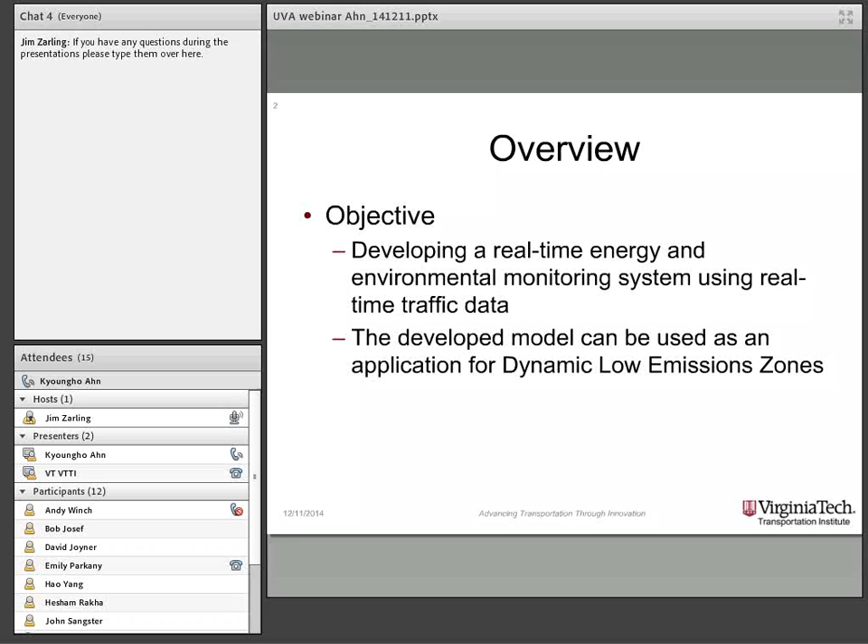The goal of this project is developing a real-time energy and environmental monitoring system using real-time traffic data. The developed model can be used as an application for dynamic low emissions zones. In this study, the real-time traffic data can be connected vehicle data, and I will explain dynamic low emission zones later in this presentation. This project is still in progress, so I will focus on the development of the fuel consumption and emission model for this project.

Background of the project. Surface transportation has significant impact on the environment. The transportation sector in the U.S. accounts for 30% of greenhouse gas emissions and 70% of U.S. fuel consumption. And also, surface vehicles represent almost 84% of the transportation sector greenhouse gas emissions in the U.S. And a key program of MAP-21 is environmental sustainability, to improve the performance of the transportation system while protecting and enhancing the environment.

And here is my first poll. Have you ever heard about the connected vehicle technologies and research programs? Okay, it seems many of you are familiar with the connected vehicle research.

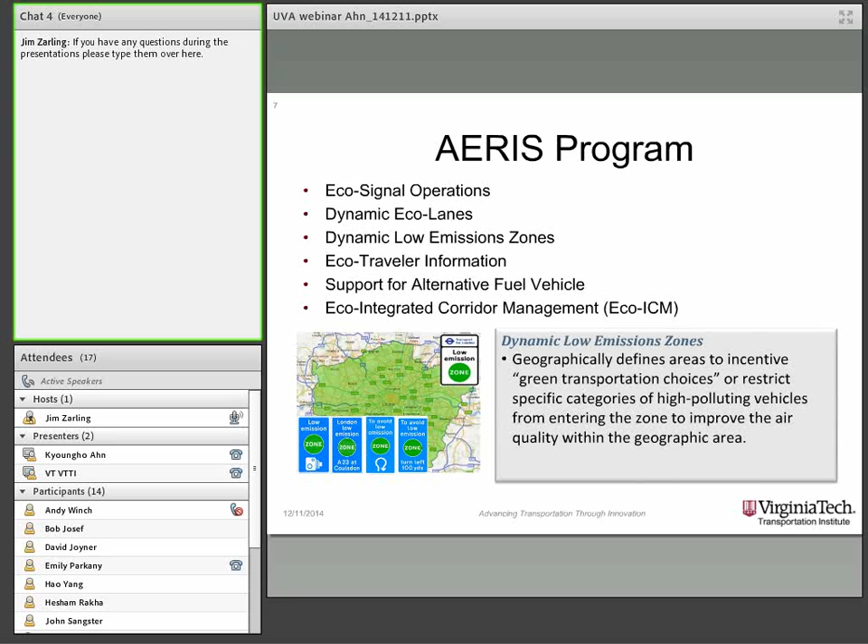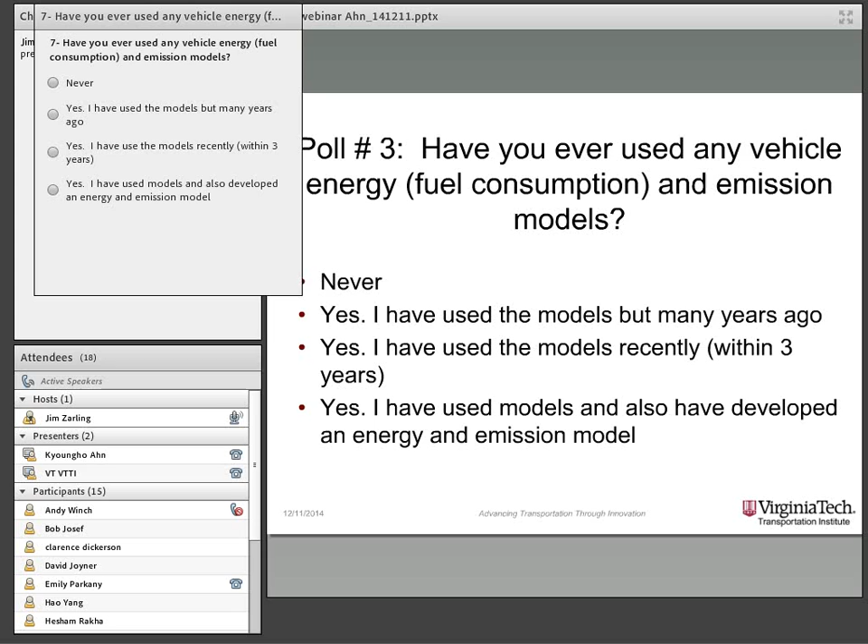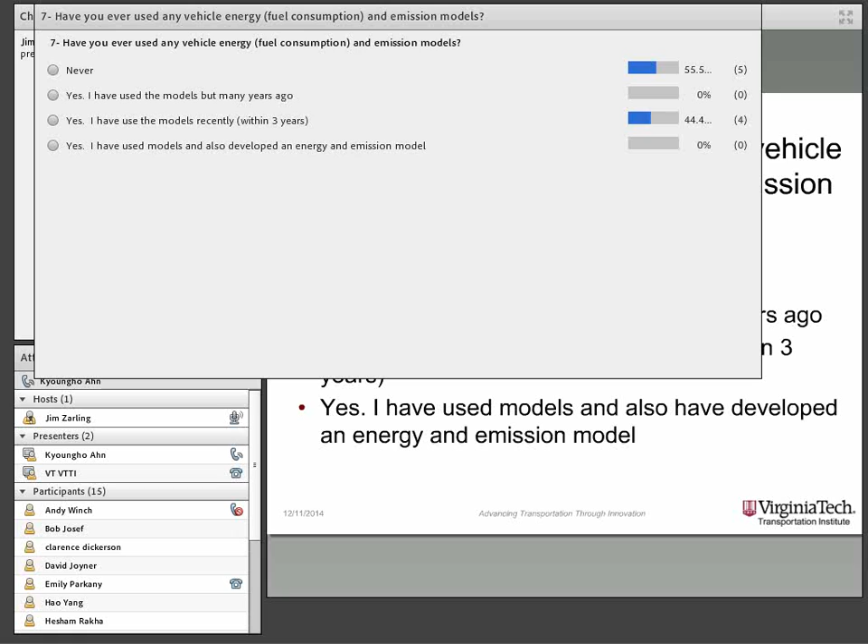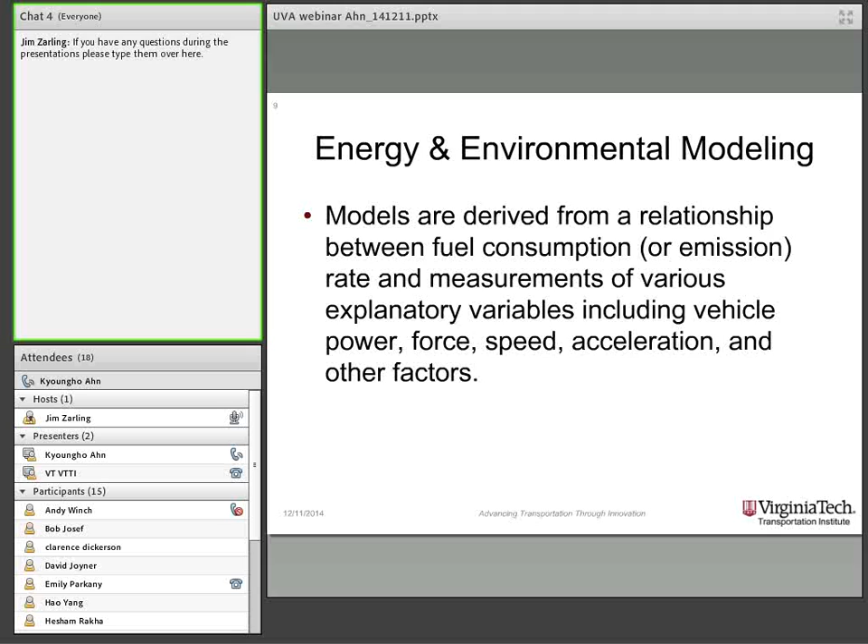And here is another poll. Have you ever used any vehicle energy or fuel consumption and emission models? Okay, one of the key components of the project is to develop a proper energy and emission model that can be used for this specific project. So the energy and environmental model is typically derived from a relationship between fuel consumption or emission rate and the measurement of various variables, including vehicle power, force, or vehicle speed and acceleration, or other factors.

Another poll. Do you know the difference between macroscopic and microscopic energy and emission models? Okay, I wanted to check this question because there are big differences between macroscopic models and microscopic models, and many of you know about the differences.

For example, if you drive a constant 50 miles per hour for 1 hour, or if you drive your car between 10 and 70 miles per hour for 1 hour because of traffic congestion, and end up with an average speed of 50 miles per hour. In the case of macroscopic models, it gives you exactly the same result for the 2 cases, but for a microscopic model, the constant 50 miles per hour driving will typically give you much lower fuel consumption and emission rate. So if you want to identify the impacts of traffic congestion or traffic signal operations, then microscopic models typically produce more reliable results.

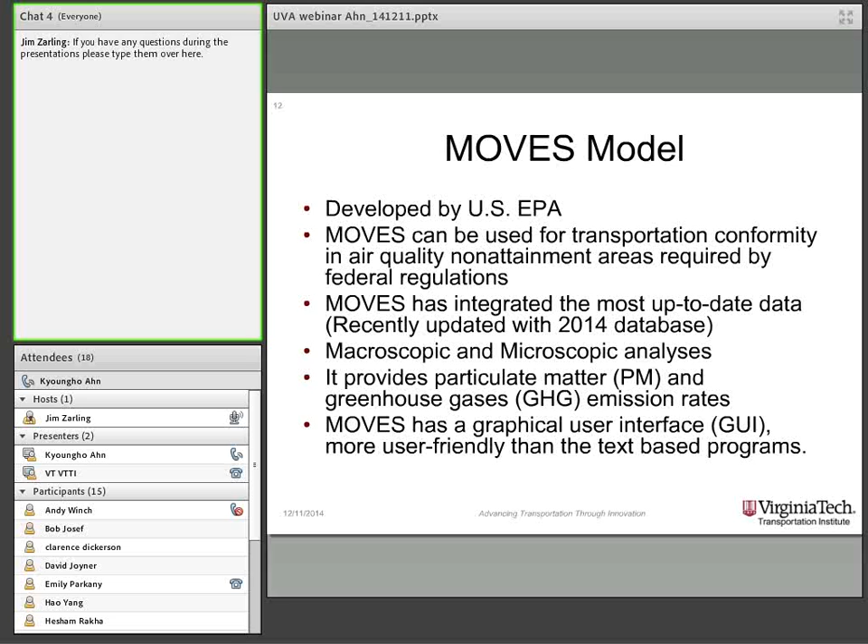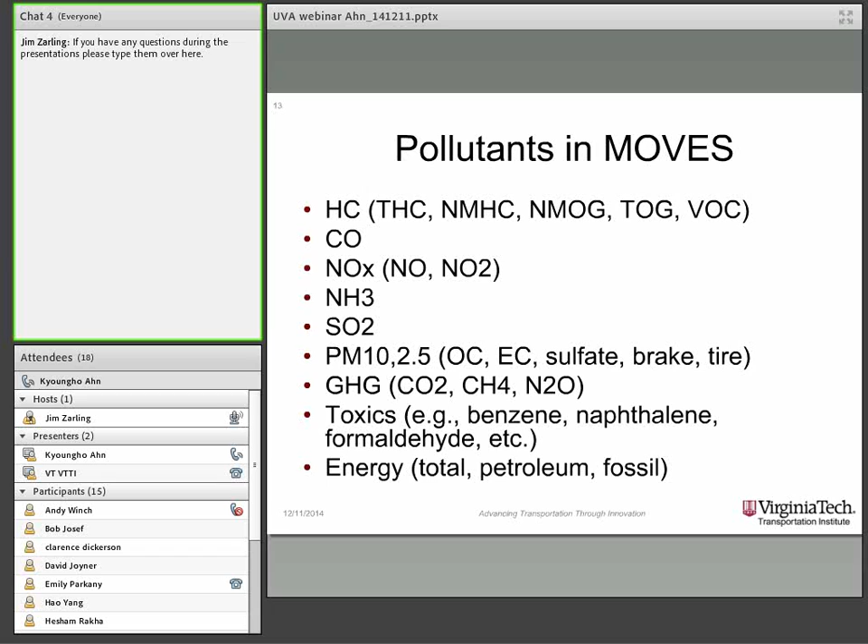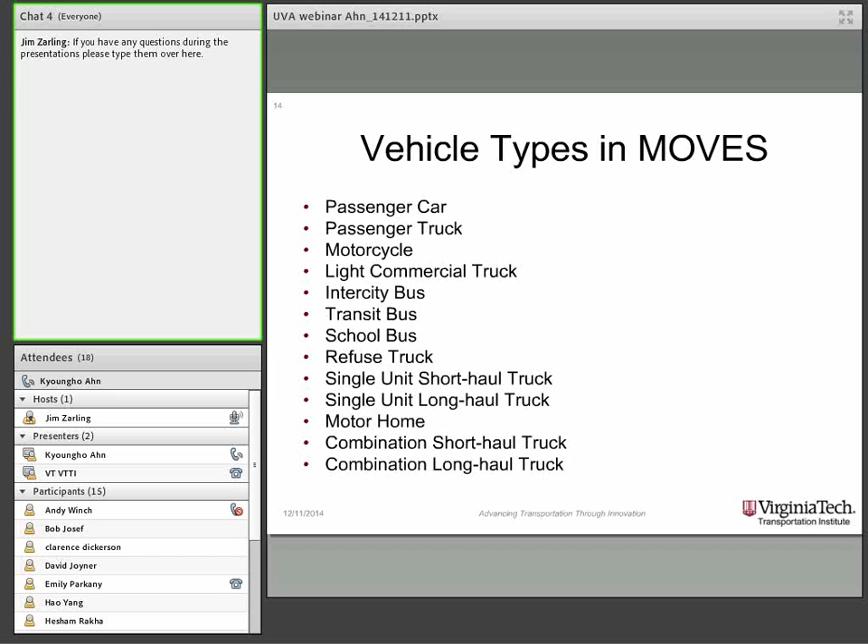MOVES can estimate HC, CO, NOx, NH3, SO2, PM10 and PM2.5, greenhouse gas emissions, toxic emissions, and energy rate. Here's the vehicle types that we can use for MOVES, and it includes passenger car, passenger truck, motorcycle, light commercial truck, intercity, transit, and school buses, and other types of trucks.

MOVES emission rates. MOVES includes different emission rates for each combination of input variables. It can be fuel type, like gas or diesel, and also vehicle type, like light-duty vehicle or light-duty truck, and vehicle model year, 2001 or 2005, and vehicle age groups, and operating mode. And operating mode depends on the vehicle speed and acceleration. So there's something called VSP, vehicle specific power, and I'll explain this later in this presentation.

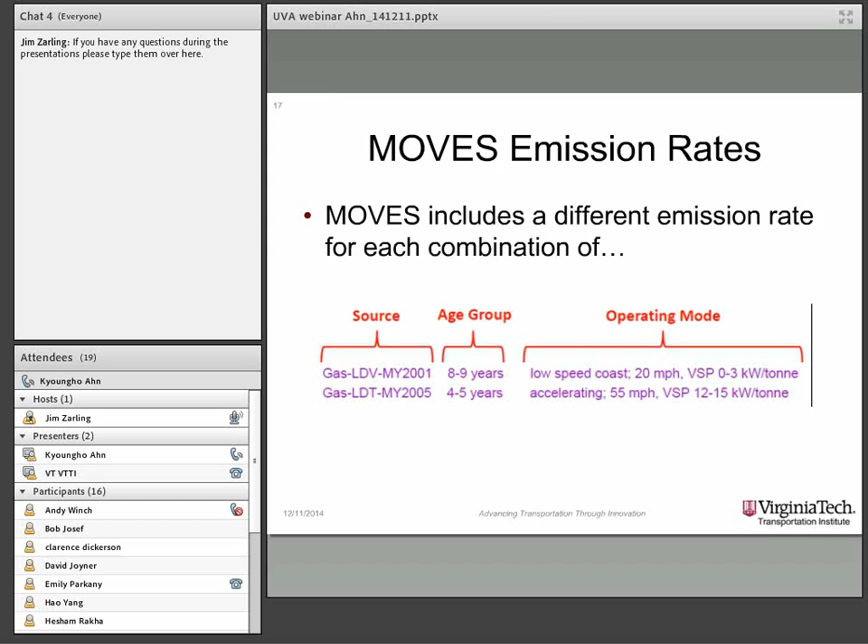To run MOVES, users should prepare a run specification, also called the run spec, and an input database. MOVES is a database program, so it requires an input database. Then MOVES can generate an output database. The database can be viewed and manipulated in MySQL, and information can be exported to another program like Microsoft Excel.

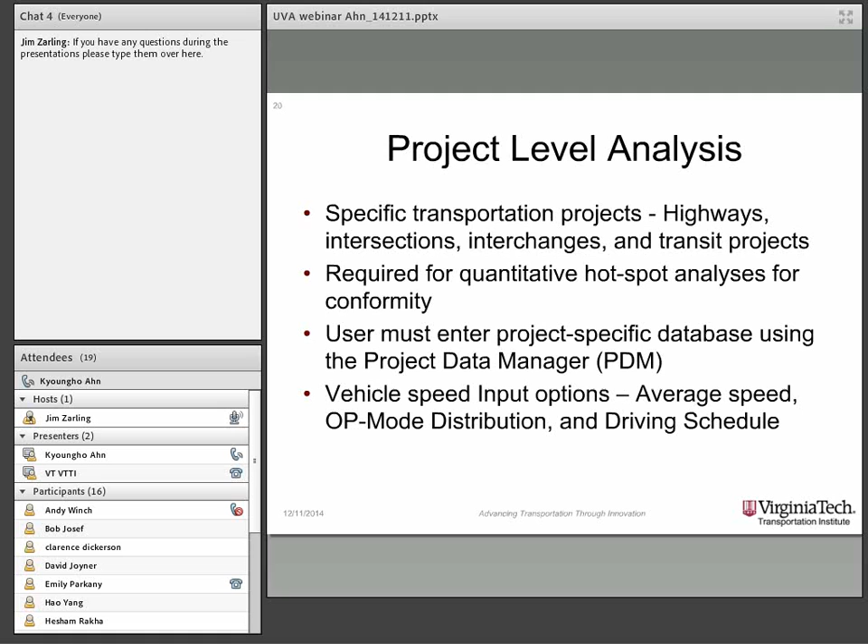MOVES has 3 scales, which are national level, county level, and project level, as I mentioned. Project level analysis can identify the energy and environmental impacts of specific transportation projects, such as highways, intersections, interchanges, and transit projects. Also, it is required for quantitative hotspot studies for conformity. Users should enter the project-specific database using PDM, which is the project data manager. And MOVES has 3 vehicle speed input options, which are average speed, OP mode distribution, and driving cycle.

So there are some difficulties in using the MOVES model for our project. First, as I mentioned, it is very complicated to prepare all input databases. The second reason is computational time. MOVES is a very heavy program. Typically it takes a few minutes, or sometimes more than 10 minutes, to obtain a result. For the same computation, MATLAB can do it in less than a few seconds.

And the last, most important reason is MOVES generates only an aggregated result of the entire scenario. For example, let's assume you want to figure out the CO2 emission from a certain section on Interstate 66. If you want to identify the concentration of CO2 emission at every milepost, it will be really difficult to figure it out from MOVES, because MOVES only produces total emission for the entire section.

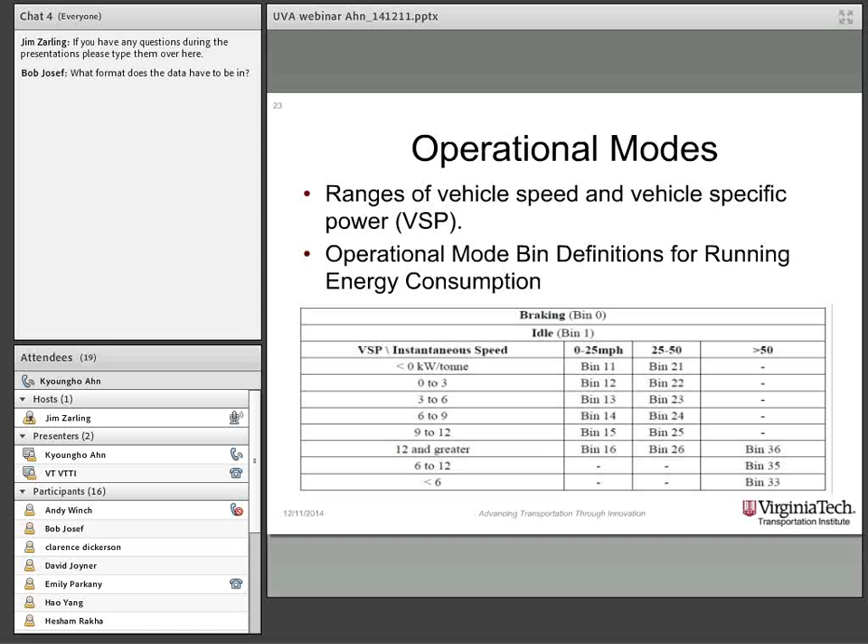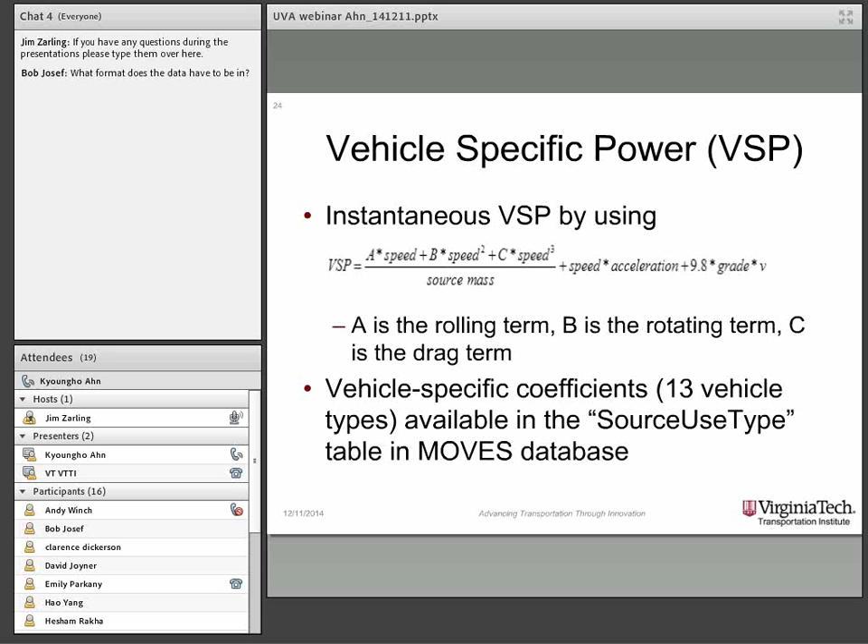Okay, here's the fun part. Let me show you how to find energy rate from the MOVES database. First, you have to find the emission rate table from the MOVES database. The database includes source bin ID, pol process ID, op mode ID, and mean base rate.

Source bin ID is 19-digit numeric data, and the first one is just an input value, and FF represents the fuel type. It can be either gasoline or diesel. Next, TT represents engine type, such as internal combustion engine or electric engine. EE represents vehicle types, like a passenger car or truck or bus, and YY represents vehicle model year, such as 2014 or 2010, and SSSS represents engine size, and the last WWWW is typically all zeros.

And pol process ID defines pollutant ID, such as HC, CO, or energy rate. And op mode ID is operational mode; we just saw it from the table. And mean base rate is base energy consumption or emission rate.

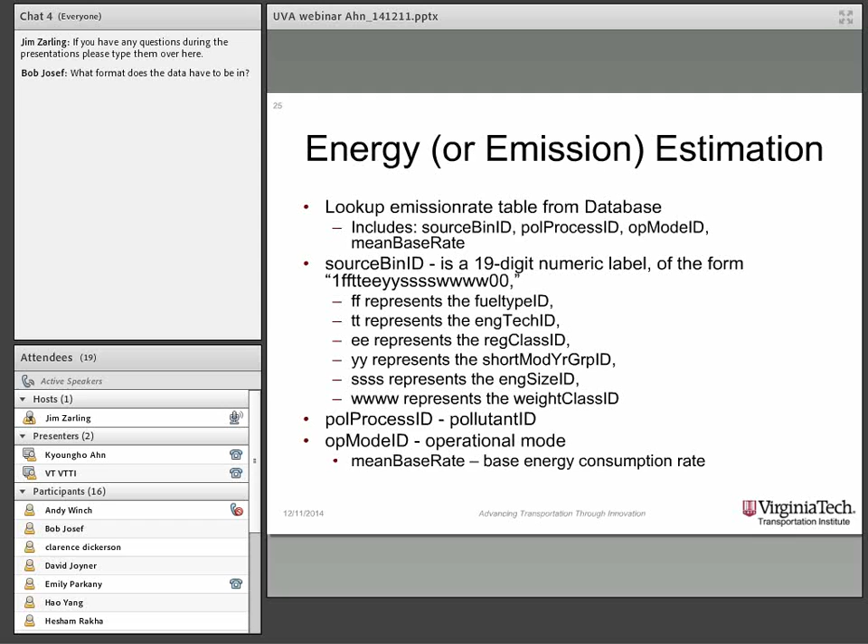Okay, here is an example of how to find energy rate using the MOVES database. If you want to estimate fuel consumption of a model year 2014 light-duty vehicle using gasoline with IC engine, and the vehicle is operated at 85 kilometers per hour with zero acceleration, then based on the VSP equation, the VSP value is 7.6. And based on the op mode table, op mode is 35.

And based on the lookup table from the MOVES database, the rate in this case is 33.44 miles per gallon, which is reasonable for relatively low speed highway driving. But if there are some acceleration behaviors, then it will increase VSP and eventually generate a higher fuel consumption rate. And for this example, I used default values for other factors such as fuel, temperature, I/M, and air conditioner impacts.

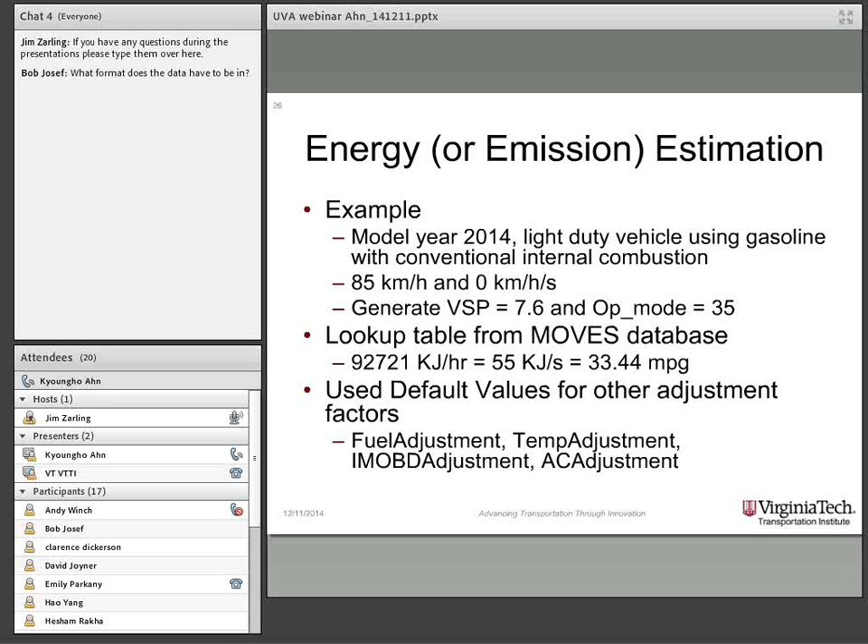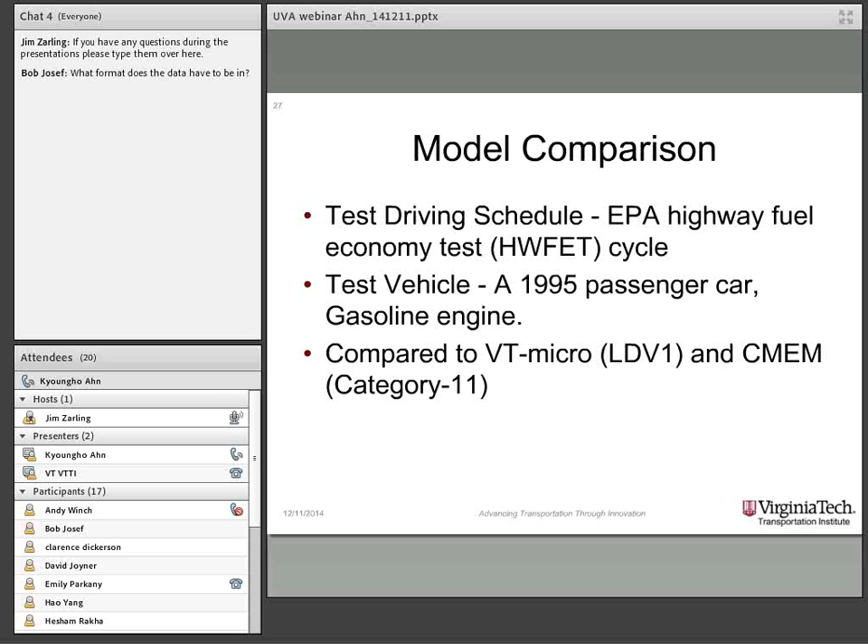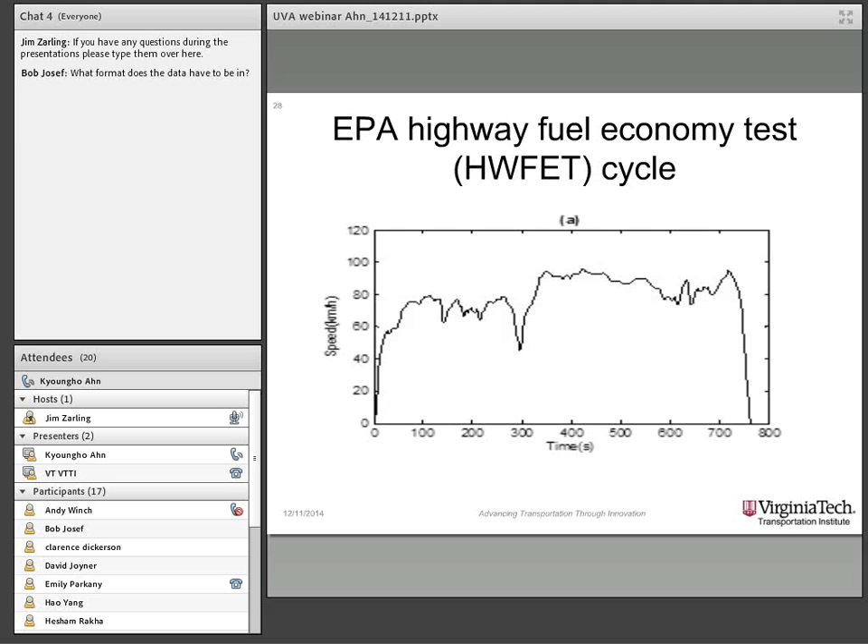Okay, I compared this new approach with other microscopic models such as VT-Micro and CMEM models, and I used the EPA highway fuel economy test cycle and a 1995 passenger car with gasoline engine. This figure shows the speed profile of the driving cycle. The maximum speed is around 100 kilometers per hour, and you can see some speed variation during the trip.

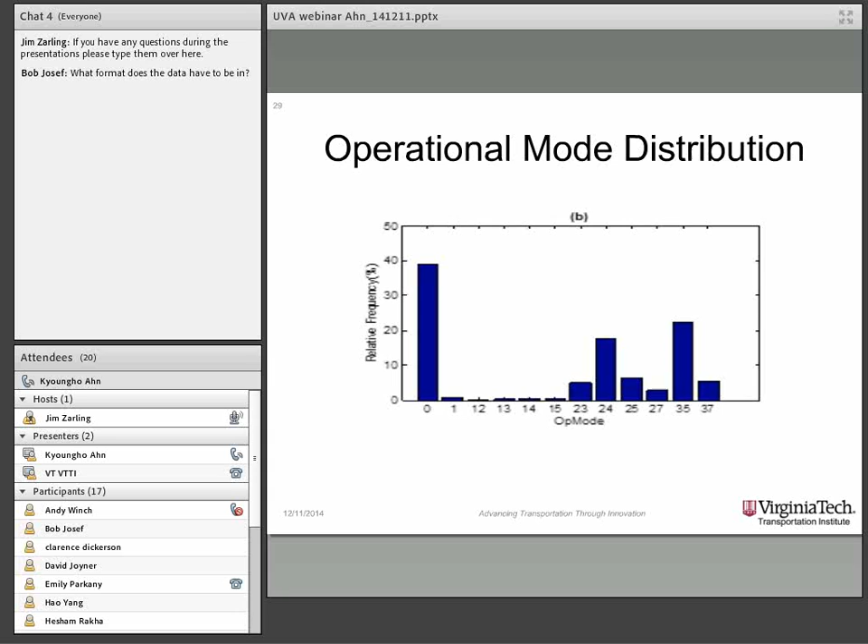And here is the operational mode distribution of the trip. You see about 39% of the trip is bin zero, which represents braking and deceleration behaviors. And here are the results. As you see, all three models generate very similar results. The new method using the MOVES database generates 0.94 liters, VT-Micro generates 1.07 liters, and the CMEM model produces 0.989 liters. And the figure also shows that the patterns of second-by-second fuel consumption rates are very similar.

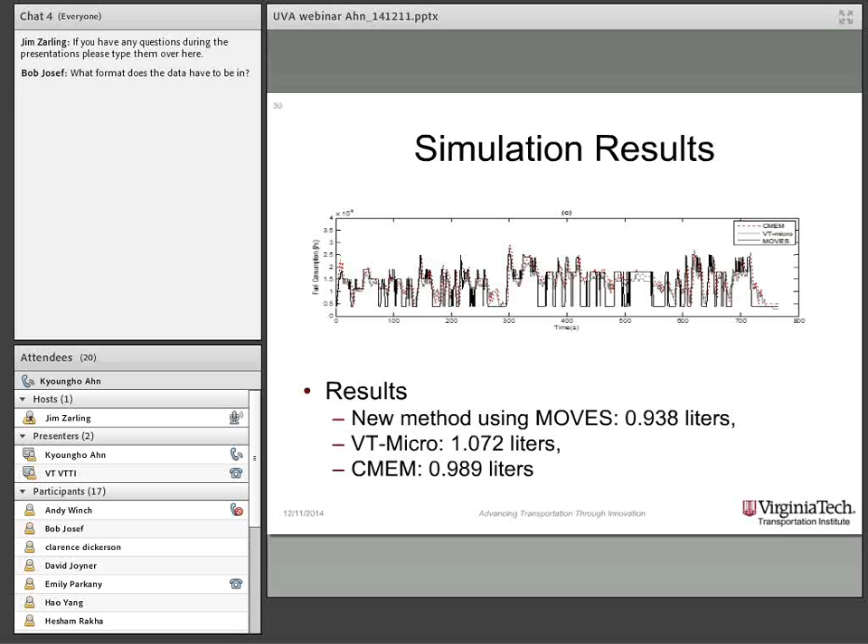Okay, as I mentioned, this project is still in progress. The next step is the development of the MATLAB interface using the 2014 MOVES database. And we'll also test the model with connected vehicle field data, such as OBE and RSE field data. Okay, this is it. Any questions from this presentation?

Thank you, Dr. Kyoungho. I guess we have one question I can see in the chat box. What format does the data have to be in?

Okay, this MOVES interface will use second-by-second speed and acceleration. But we can also use input from the average speed as well, because there are typical driving cycles from the EPA's multiple driving cycles, so you can just pick one. And for other inputs like temperature or air conditioner impact, we just use the default values, so you don't need to worry about other inputs.

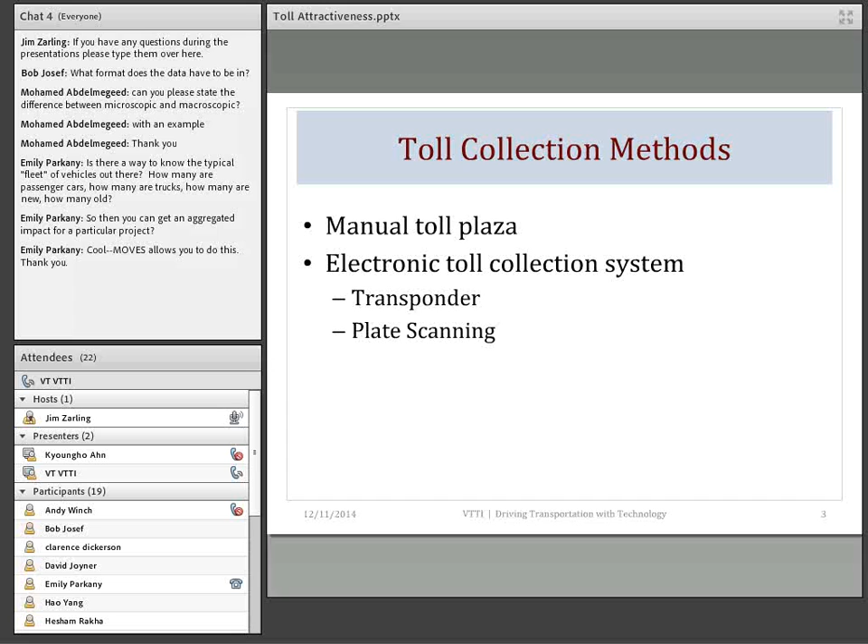So there are still debates going on about toll roads. Supporters believe that charging tolls to road users will increase revenue, relieve congestion on the roads, and improve the efficiency of the network. However, opponents believe it is against social equity, and they think that charging a toll actually slows down traffic.

Whether it is a traditional toll plaza where you have to stop and pay, or an automatic payment system where the gate detectors detect your vehicle automatically, you still slow down somewhat when you pass the gate. They also believe the benefits of toll roads don't tell the complete story, because traffic diverted from toll roads to free parallel roads causes additional congestion in the network, which is not incorporated when you evaluate the benefits of toll roads.

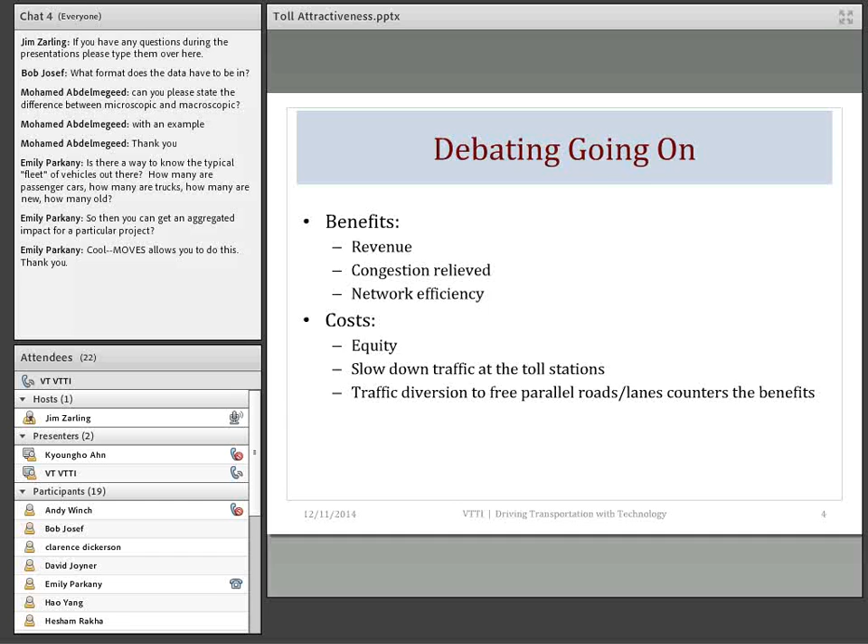So here comes the first survey. Do you think tolling is a good solution for congestion? Oh, okay. Okay, moving on.

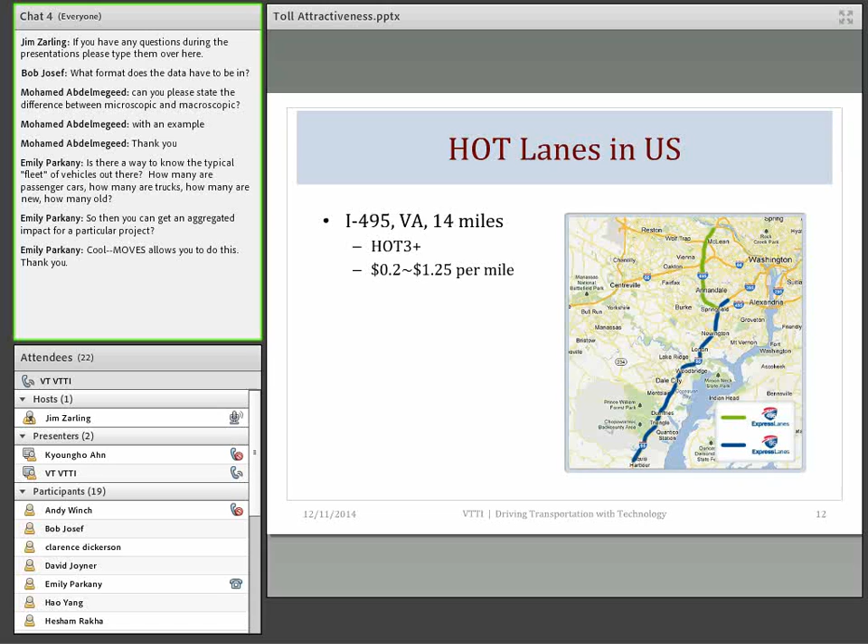All those examples, as we can see, show that HOT lanes are usually used in places where it is very congested. Most of these places are metropolitan areas. And usually there's an HOV in place, but it is underused. And also there's very limited space or money to expand the existing roads or build another new road.

So here comes my favorite, SR 167 in Washington. This is the study corridor in my research. I think this is my favorite because this actually reminded me of my work a long time ago, about 10 years ago when I worked in a consulting company. I still remember the days when my colleagues and I were sitting in our conference room trying to raise the toll rates all the way up to $12. Still, we saw a lot of congestion in our simulation results.

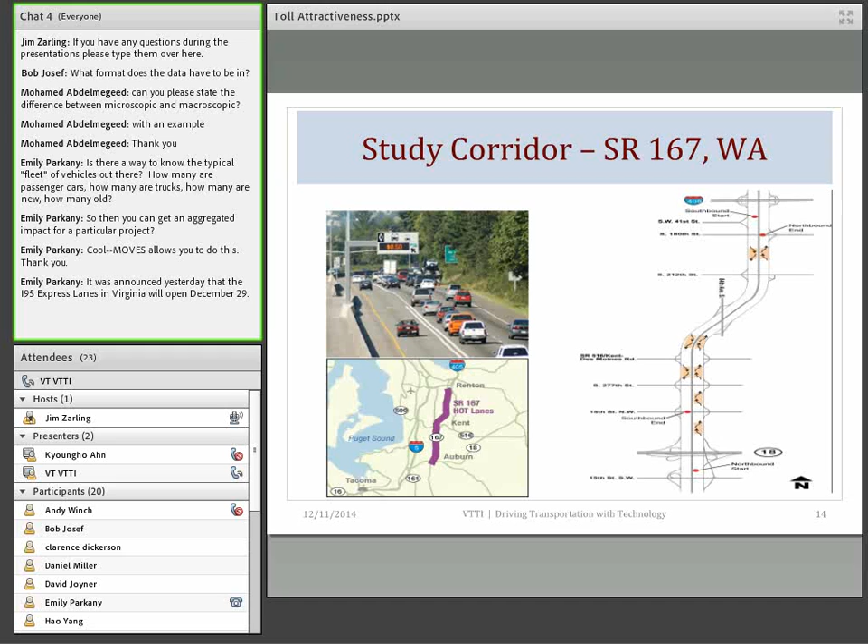Back then, what we were trying to do is to predict the revenues and the traffic flows in this corridor using the information that we know, such as the value of time in the area, traffic counts, and so on and so forth. Because there were no precedent cases back then in 2004, we had very little experience studying such corridors. The HOT lane back then was a really new idea. So fortunately, now all those things that we were trying to predict have become historical data that I can use to study how people really react in the real world to HOT lanes.

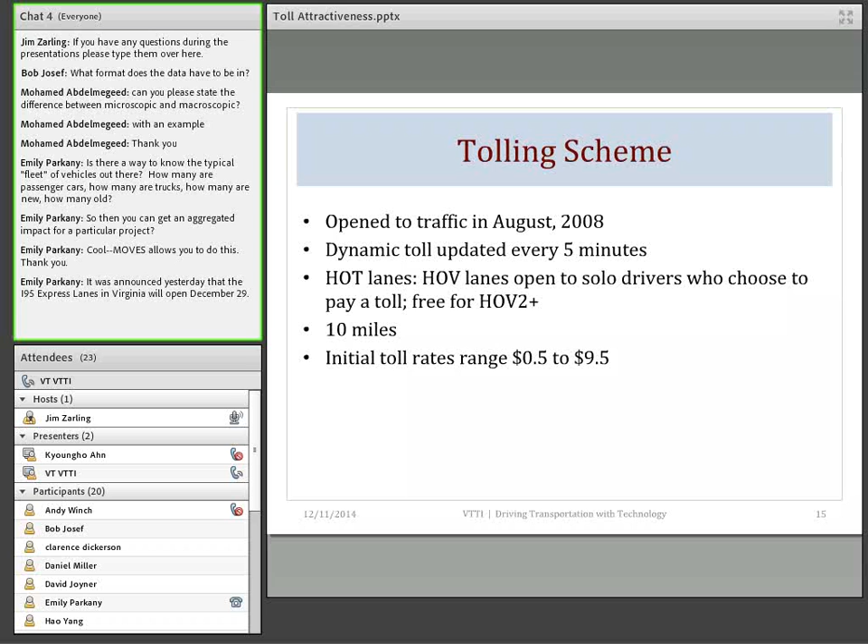SR 167 was opened to traffic in August 2008. It's a dynamic toll system updated every 5 minutes. It's a HOT 2+ facility, which means that if you are a single driver, you need to pay, and if you have 2 or more people in your vehicle, you can use that facility for free. The total length is 10 miles, and the initial toll rates range from 50 cents to $9.50.

Here's the second step survey. Which of the following factors is the most important one for you when you are driving on the road?

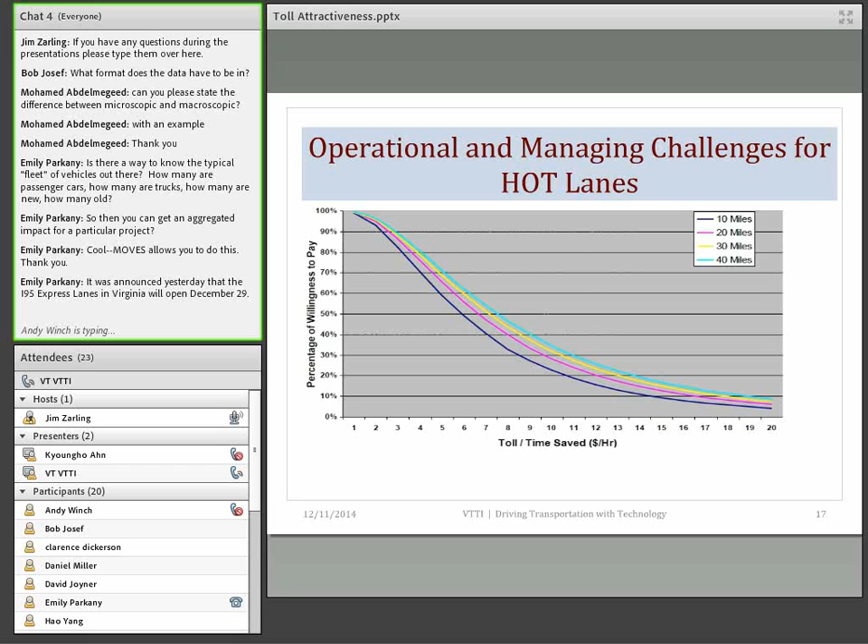So let's think about all those issues, and I come up with this conclusion: choosing HOT or not may not be as simple as an engineering question or a mathematical question. It's more like a combination of engineering and psychology. So let's take a step back. Instead of rushing to model all those complicated factors and variables, let's take a look at the data itself. Forget that you are an engineer or a mathematician or statistician who knows exactly what your time savings are. Just think of yourself as a regular road user, driving your vehicle on congested roads. What will you do? So let's let the data talk.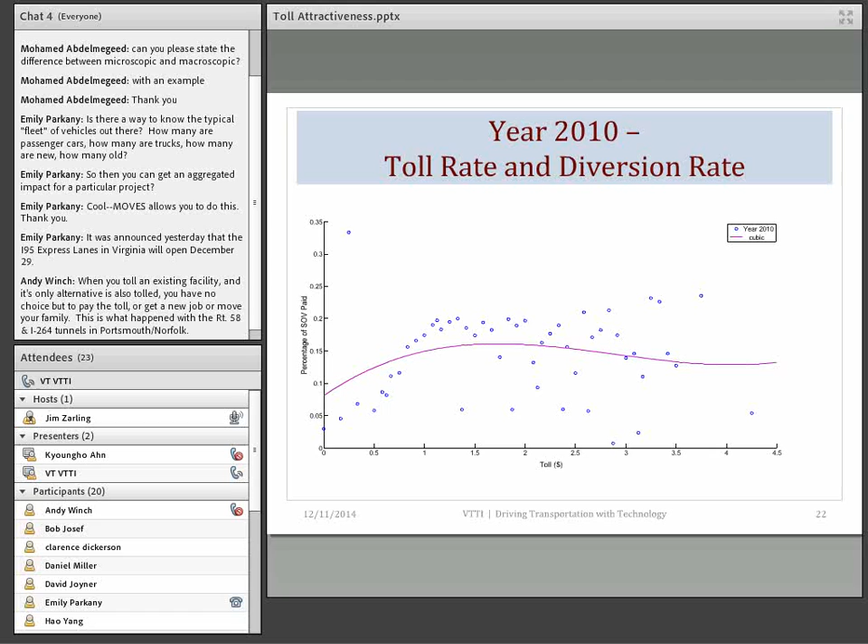When you overlay those two figures together, you can see the differences between those two years. In the opening year, 2008, the curve actually levels out very quickly and stays like that. But in year 2010, it's a very quick jump, and then it levels out, and you can see the percentage of people willing to pay almost doubled that number in 2008.

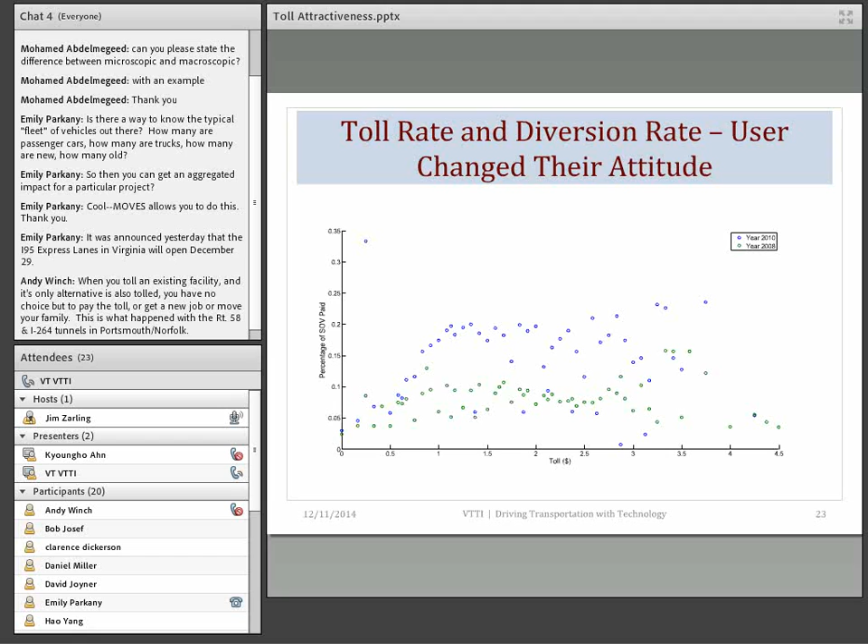You may have a question by now: why is the diversion rate actually increasing when the toll rate increases? As we discussed before, the HOT lane is in a dynamic tolling system, which means they update the toll rates every 5 or 10 minutes according to the traffic condition on the road. This leads us to think about the relationship between the diversion rate versus the traffic volumes.

This is very understandable, because you're willing to pay to avoid the congestion, but if it's really congested, why should you bother to pay the money but still sit in traffic without moving? So a lot of people would choose to get out of the HOT lane.

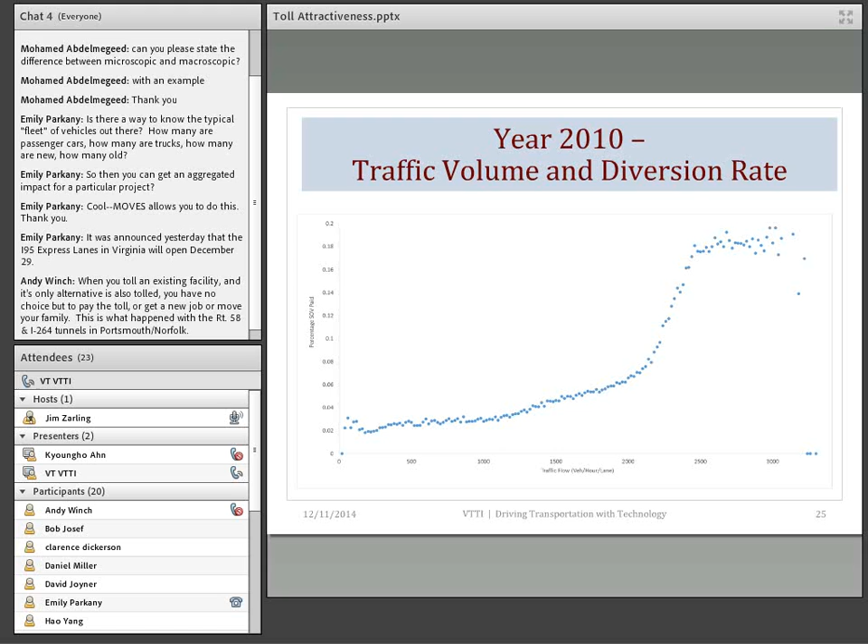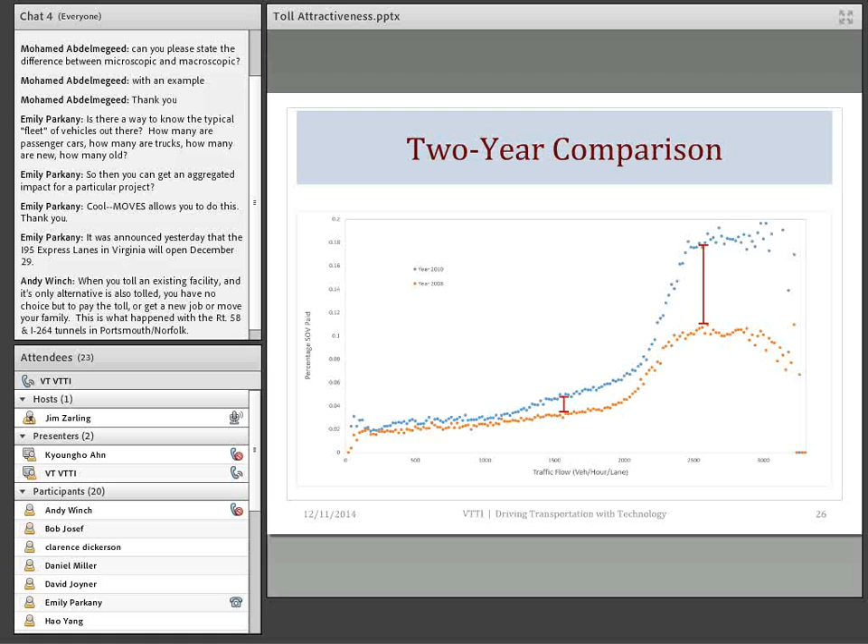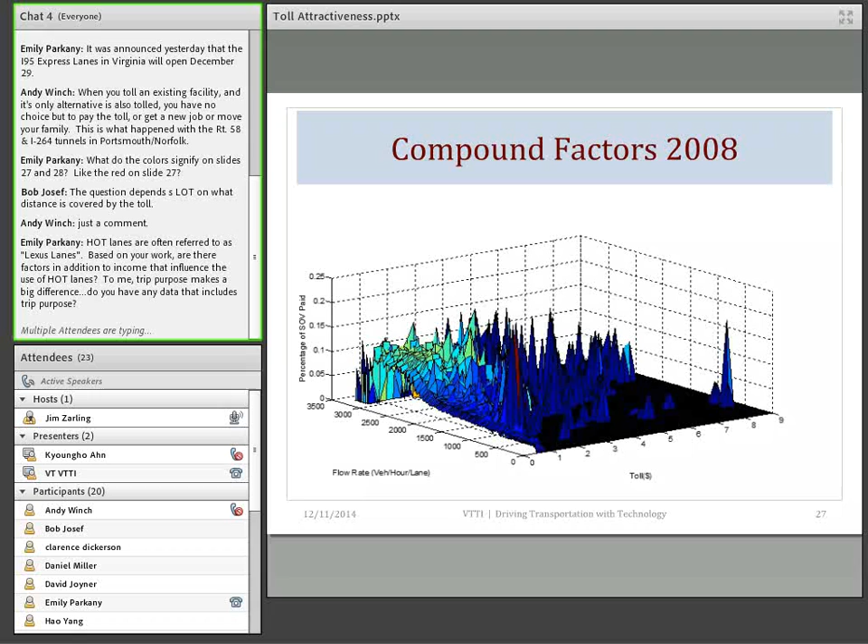And then Bob Josef, hi by the way. The question depends a lot on what distance is covered by the toll. That's true, yeah, I totally agree with you. Oh okay, I see, yeah, true.

Is there any questions, comments? Yes, there's one. What? Which one? Emily. Oh, Emily, okay.

Unfortunately Emily, I do not know the trip purposes in this case. What I can think of right now is that probably I would make assumptions about the time of the trip. If it's during peak hours, say early in the morning, 6 to 9 o'clock, I would assume that majority of the trips are commuting trips, because this is a very important commuting corridor south of Seattle. That is actually a very good question, I have been thinking about this. If we can incorporate the trip purposes into the data, that will contribute to the results a lot.